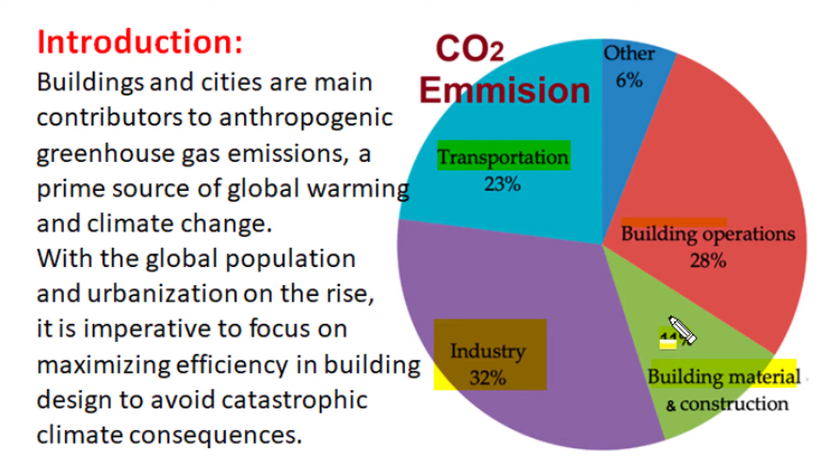So in total, 40% or 2/5 of total CO2 emission from man-made activities is contributed by buildings and cities. So we can say buildings and cities are a prime source of global warming, causing severe concern of climate change as global population and urbanization rise. This will enhance greenhouse gas emission and global warming, resulting in catastrophic damages to our environment and ecology, such as loss of ice near poles, rise of sea level, and incidence of intense storms, rains, or severe droughts.

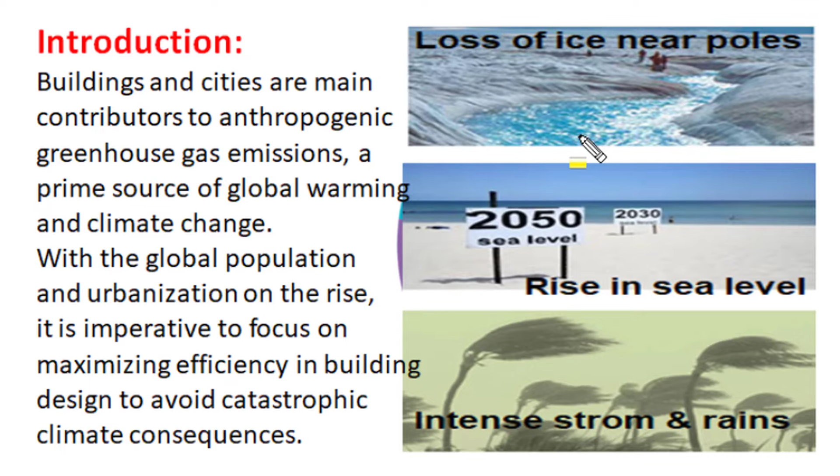So in order to maintain sustainability of our environment, it is imperative to focus on maximizing efficiencies in building design, so that we can avoid the catastrophic climate consequences which people are facing nowadays.

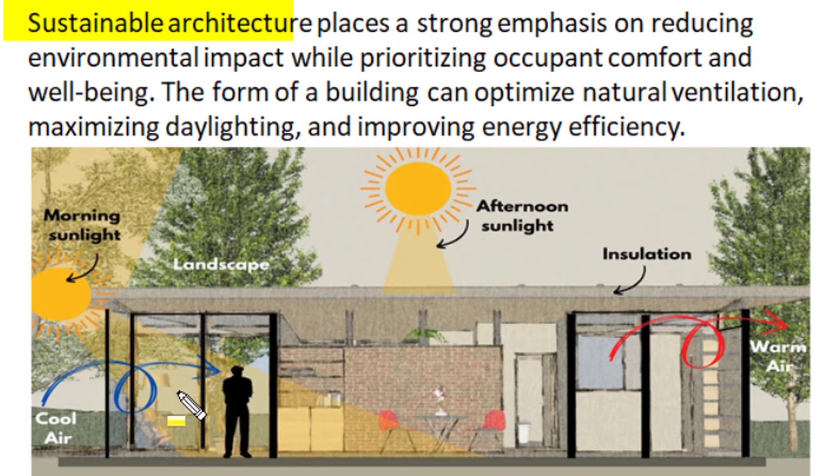Sustainable architecture or the concept of green building places strong emphasis on reducing the environmental impact of building operation while prioritizing occupant comfort and well-being. Such green buildings use a form of building that optimizes natural ventilation, maximizes daylighting, and improves energy efficiency in heating, ventilation and air conditioning of building space.

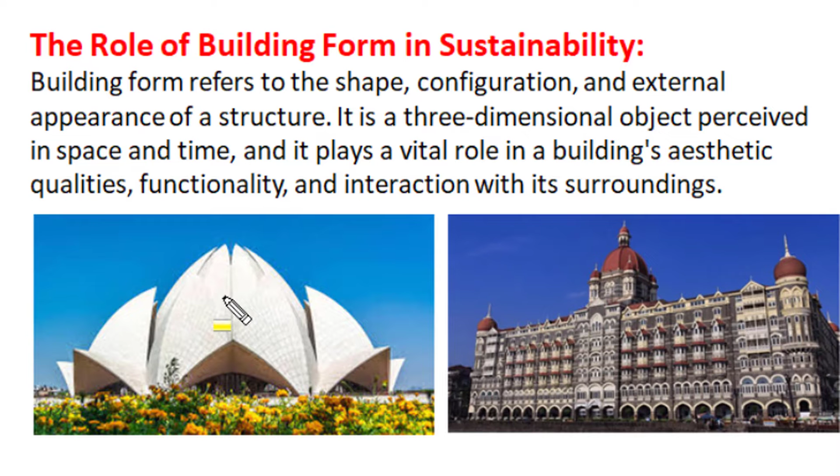Building form refers to the shape, configuration and external appearance of a structure. It is a three-dimensional object perceived in space and time by visual experience, and that plays a vital role in a building's aesthetic qualities, functionalities and its interaction with surroundings. A correct building form has a great role in sustainable architecture.

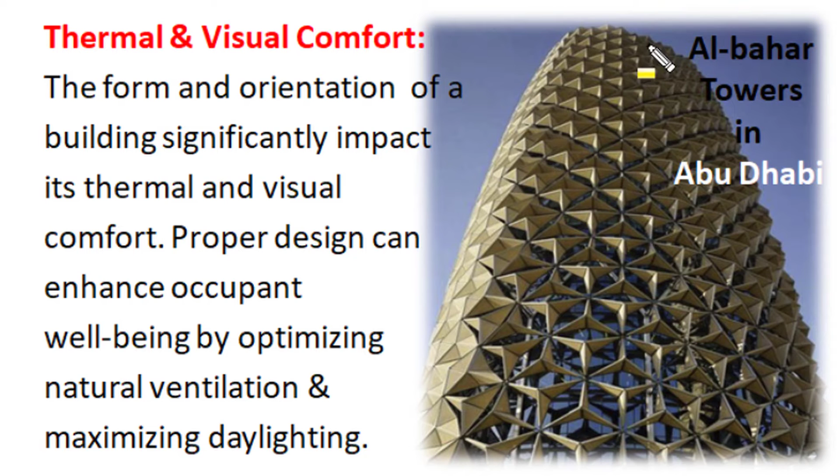The proper design of building form can enhance occupant well-being by optimizing natural lighting and natural ventilation, which optimizes passive energy efficient design. The building form decides size, shape, material and design of the building envelope, and this building envelope is crucial for controlling thermal heat transfer between indoor and outdoor spaces.

In a well-designed building form, one can reduce the area size of the building envelope or external surface area, and simultaneously increase internal volume. This will lower heat transfer losses and enhance operational efficiency, lowering energy consumption and minimizing environmental impacts of building operation.

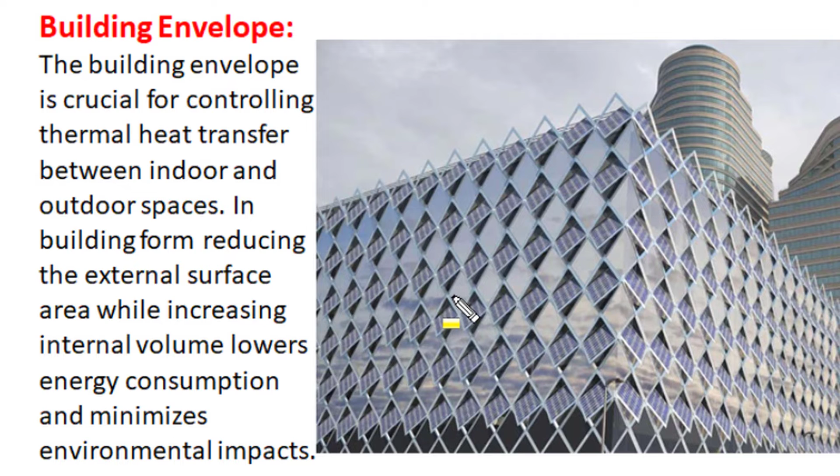The ratio of surface area of building envelope to the volume the building occupies is very important in deciding energy efficiency of building operation, and this surface to volume ratio is decided by building form. Building form determines the volume of space inside a building that needs to be heated or cooled. So we are using volume and we have envelope surface area for heat transfer.

A building which is more compact in shape results in lower surface to volume ratio. Here we have two 6-story buildings meant for office activities, each floor with 10 feet height. One is a rectangle floor plan with size 50 feet by 200 feet, so the total floor area per floor is 10,000 square feet.

Now the same 10,000 square feet could have a square floor plan instead. Both buildings have the same amount of total 6-story floor area, that is 10,000 square feet per floor, and in all 6 floors.

So it is 60,000 square feet in both buildings. But if we consider the envelope surface area, for this rectangle floor plan, the envelope surface area is 40,000 square feet, while for the same total 6-story floor area, the envelope area of the square building is less, only 34,000 square feet. So the square plan has a lesser envelope area and lesser surface to volume ratio, making it more thermally efficient than the rectangle.

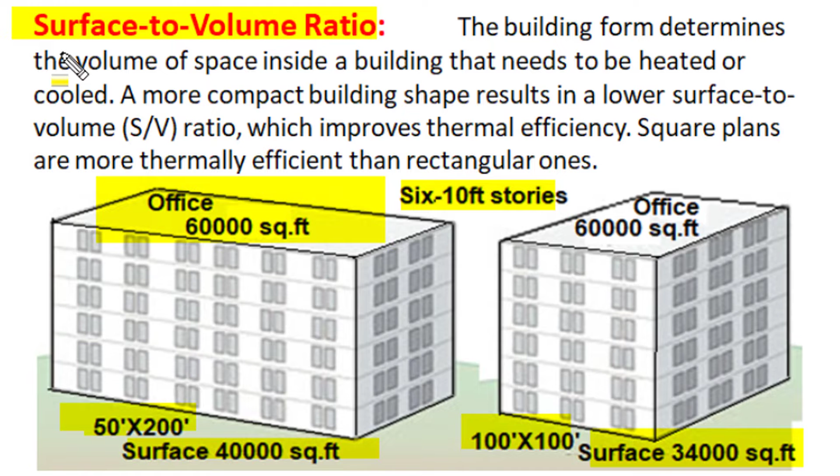And if in place of a square plan we had used a circular plan, that would fetch a more compact building design with a lesser surface to volume ratio, or better thermal efficiency.

When we consider building form for energy efficiency of building operation, we should consider its total floor area, perimeter, building height, and surface to volume ratio. If a building has a greater perimeter to surface area ratio, more heat transfer will take place from the envelope sides, so it will have both more heat gain in summer and more heat loss in winter. So for energy efficient operation, we have to reduce this perimeter to area ratio.

In place of a rectangle floor section, a square floor section has a better, lower value of perimeter to area ratio. And for any geometry, the minimum perimeter for a given surface area will occur when the geometry is circular.

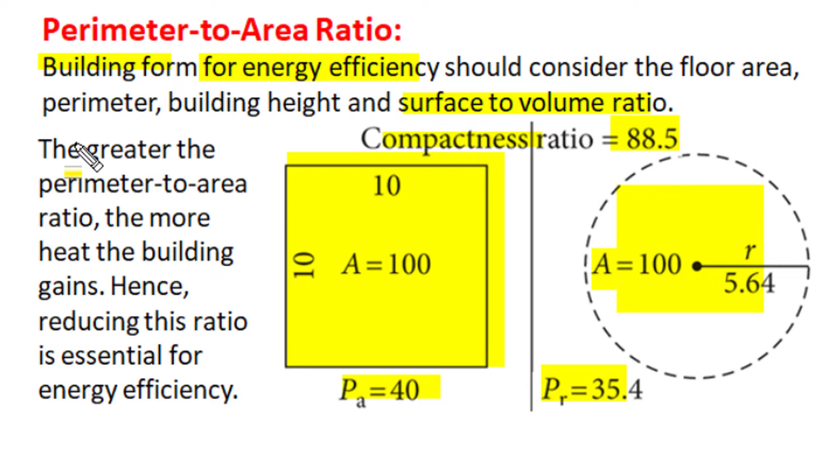So for a 10 by 10, 100 unit floor area, if we take a circle of radius 5.64 units, it would have an internal area of 100 units, but its perimeter is less than that of the square section. In the square section, the 4 sides of 10 units each give a total perimeter of 40 units, whereas for a circle of radius r, the perimeter is 2 pi r, which is 35.4. So compared to the square section, the circular section has a compactness ratio of 88.5. So in place of a rectangle section, the square section is better, and the circular section is the best.

So building form—the shape, configuration and external appearance—affects the sustainability of any building structure, and building form is influenced by the choice of material and construction techniques used to build any space.

When we use simple forms with basic shapes and small volume, it will minimize use of material resources, which not only saves construction cost but also reduces the environmental impact of building construction and operation. So simple forms with basic shapes, small envelopes, and compact designs are suitable for sustainable architecture as they reduce environmental impact of building construction and operation.

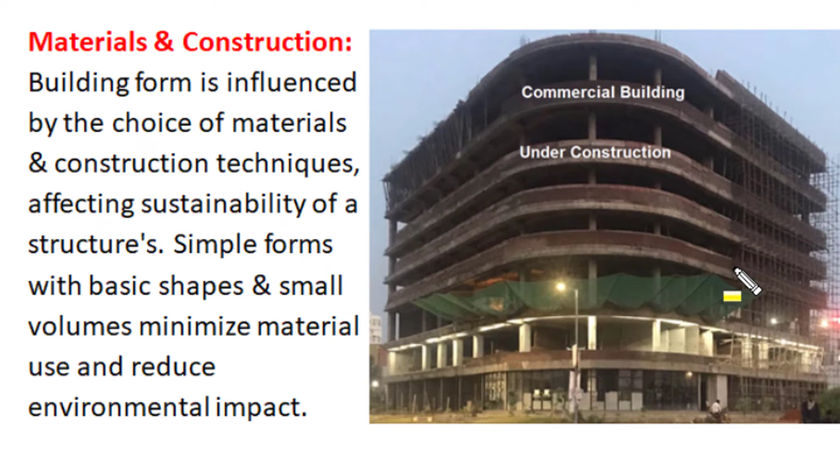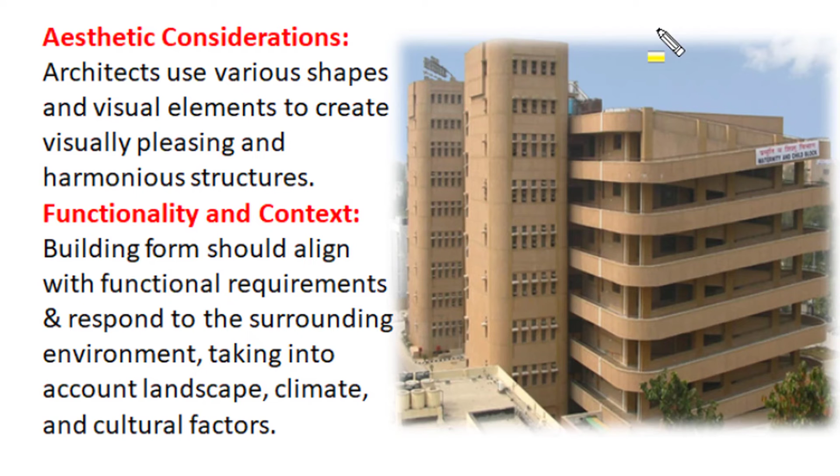Architects use various shapes and visual elements to create a visually pleasing and harmonious structure for an aesthetic, pleasant, attractive appearance of the building. All building forms should align with the functional requirements of the building space, and should respond to the surrounding environment, taking into consideration the landscape, climatic conditions, and cultural and functional factors. As this building form of a hospital generates the required aesthetic considerations as well as fulfilling functionality and context requirements.

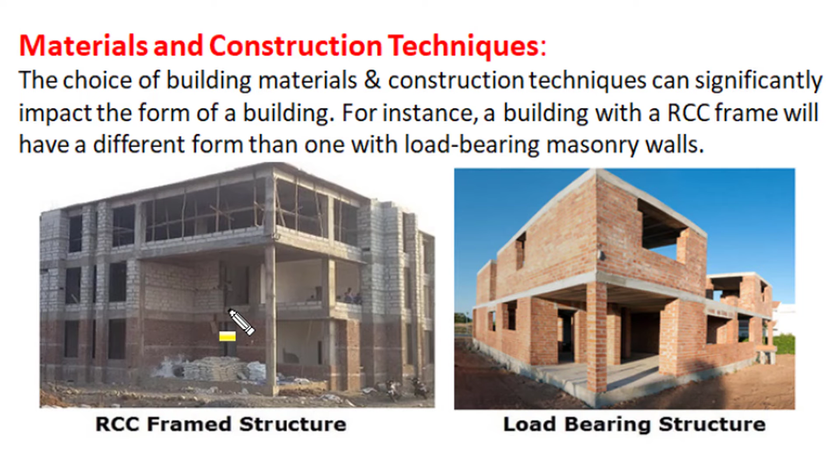The choice of building material and construction techniques can significantly impact the form of a building—its shape, configuration, or external appearance. For instance, a building with an RCC frame structure has a different form and has more flexibility in form design, whereas a building with load-bearing masonry walls has a limitation in form selection and should have a simple straight line formation for its building form. So the choice of building material and construction technique has an impact on the form of a building.

Different architecture styles have unique forms that can be associated with specific cultural or historical references. For example, Gothic architecture is known for its pointed arches and ribbed vaults, while modern architecture often features clean lines and minimal ornamentation.

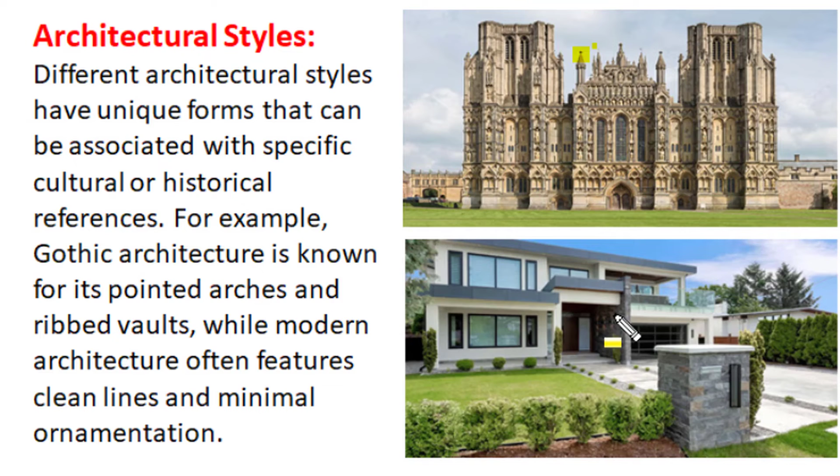Building form significantly influences natural ventilation. Cross positioning of openings and windows enhances natural ventilation, and this reduces reliance on mechanical heating, ventilation, or air conditioning systems, resulting in savings in energy consumption. So careful orientation and proper layout promote cross ventilation.

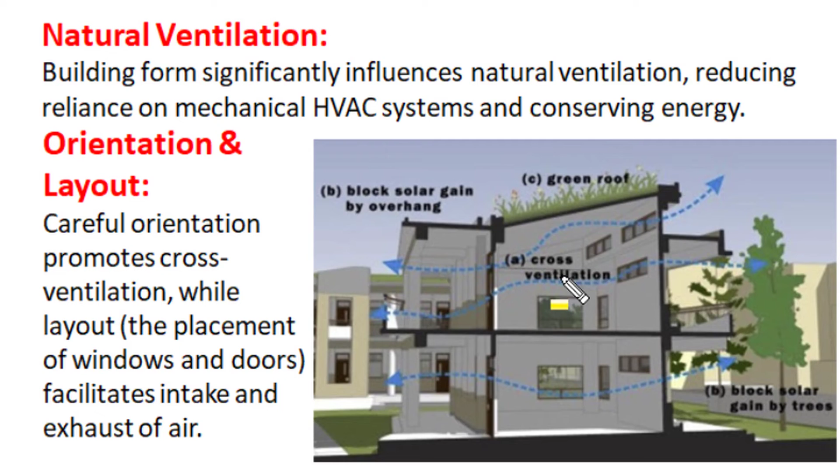The placement of windows and doors facilitates intake of fresh cool air and exhaust of bad and hot air. Building shape decides the facility of natural air circulation. If a building shape has open courtyards, atria or open plans, then it will encourage natural air circulation and improve energy efficiency of building operation.

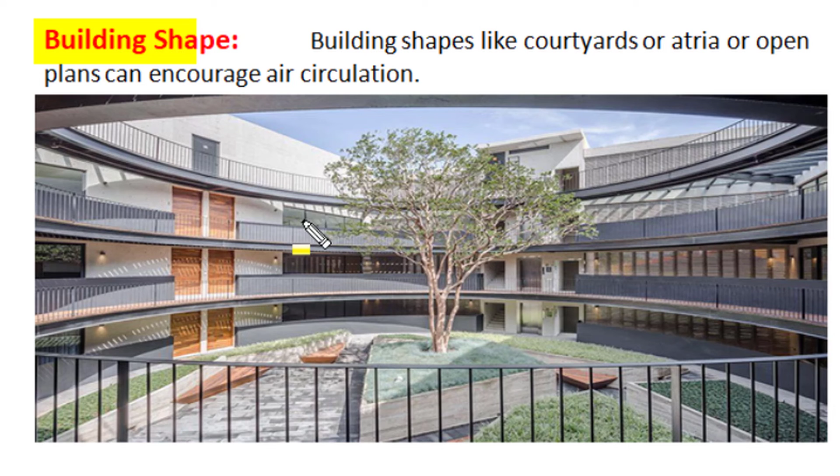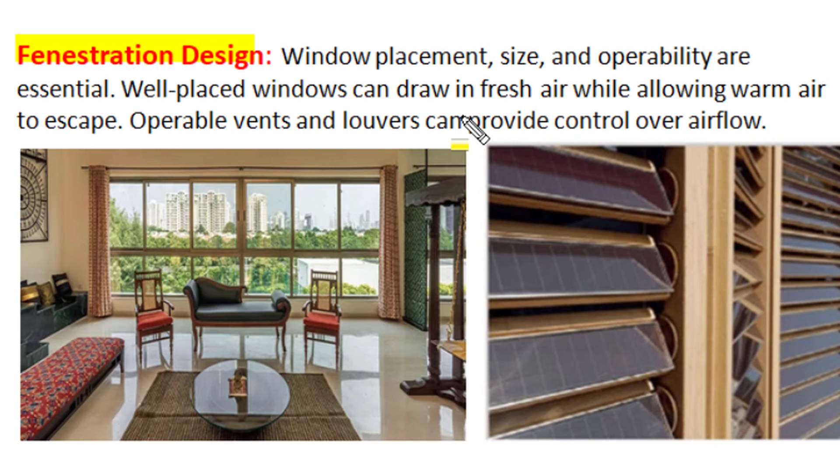Fenestration design in a building is also a part of building form. The placement of windows, their size and their operability is very essential for energy efficient green buildings. Well placed windows can draw fresh air inside the building space while allowing warm bad air to escape out of the building. Operable vents or louvers can provide manual or automatic control over airflow. So fenestration design, placement of windows at appropriate positions and of appropriate size is very important in a building form.

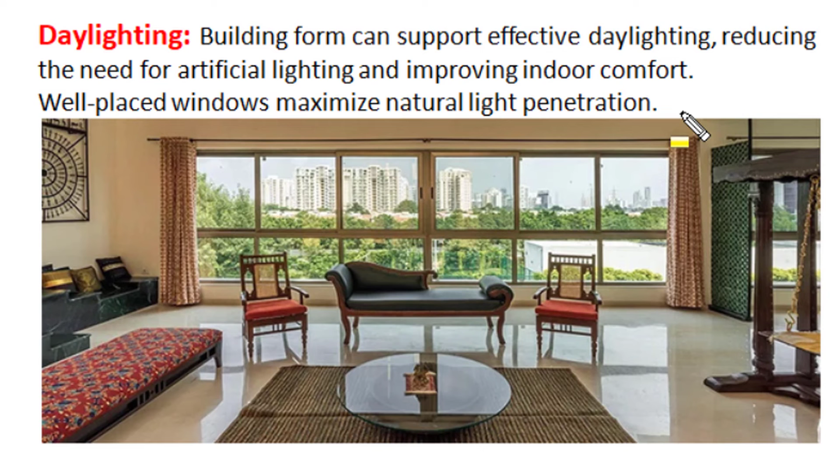Good fenestration design in a building form can support effective daylighting, and that reduces the need for artificial lighting and also improves indoor comfort with glare-free, good illumination levels and uniform lighting by natural means. Well placed windows maximize natural light penetration, and appropriate external shading can reduce glare and the heat component of solar radiation. Good architectural features in building form can be used to enhance natural daylighting in building operation.

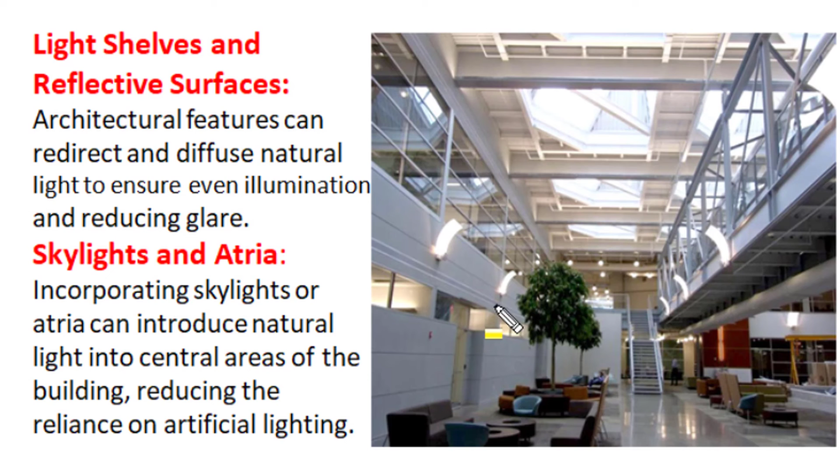Light shelves, reflective surfaces, skylights or atria can direct, redirect or diffuse natural light to ensure even illumination, uniform lighting and glare-free vision. So in a building with central area locations, we can introduce natural daylight by incorporating skylights or atria, and this will reduce the requirement of artificial lighting, conserve our energy resources and enhance comfort and well-being of occupants.

The most important consideration for any green building operation is its energy efficient performance, and building form directly affects energy performance of building operation. An energy efficient building should have a compact design. A compact design minimizes the exterior surface area from which heat gain or heat loss will take place, and such compact buildings having less surface area to volume or less perimeter to floor area become more energy efficient in operation, and this compact design consideration is especially important in regions with extreme hot or cold climates.

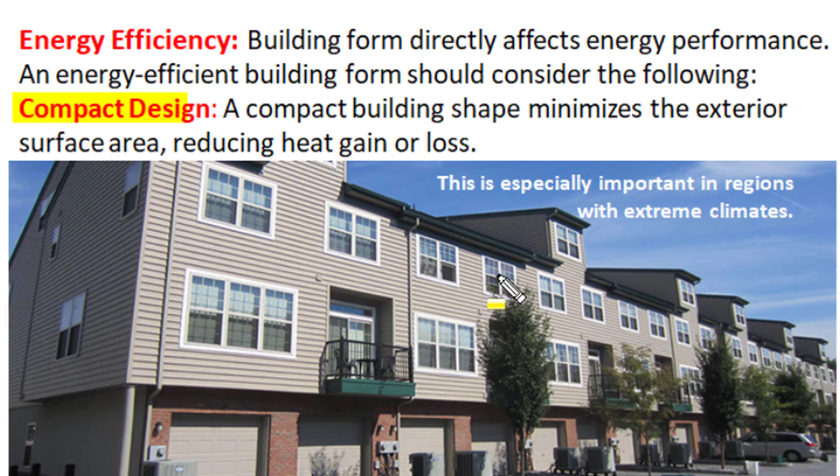A building form with suitable building material for insulation and the required amount of thermal mass can ensure appropriate temperature conditions inside the building space to ensure comfort and well-being of occupants. So building material and wall thickness influence thermal performance of any building form. Proper material selection, thickness and design create the required insulation, and use of thermal mass maintains indoor temperature, as thermal mass absorbs daytime heat and the same heat, when released at night, maintains indoor temperature.

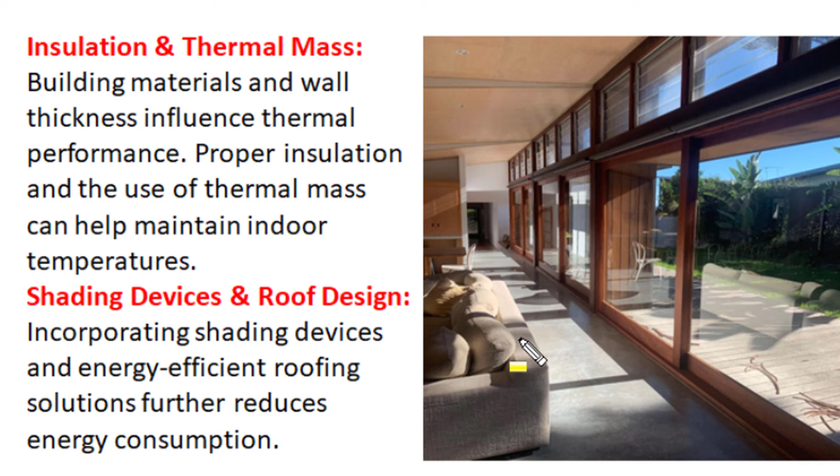Now to stop excessive heating during daytime, we can incorporate proper shading in form design, and such shades with appropriate thick glass paneling reduce heat gain during summertime, and in winter when the sun is at lower positions, this shading won't come in between the sun's radiation and the building, and the space can get both light as well as heat of the winter day. So appropriate shading design, appropriate shading devices, roof design, use of insulation and thermal mass can maintain indoor temperature for comfort and well-being.

In conclusion, we can say sustainable building design is a multifaceted endeavor, and building form is one critical aspect of sustainable building design. By considering natural ventilation, daylighting, and energy efficiency in the initial design stage, architects can create structures that not only minimize environmental impact but also enhance the comfort and well-being of occupants and reduce operation cost of the building. The integration of these principles of natural ventilation, daylight, and energy efficiency into building form is a key step towards a more sustainable and resilient built environment.

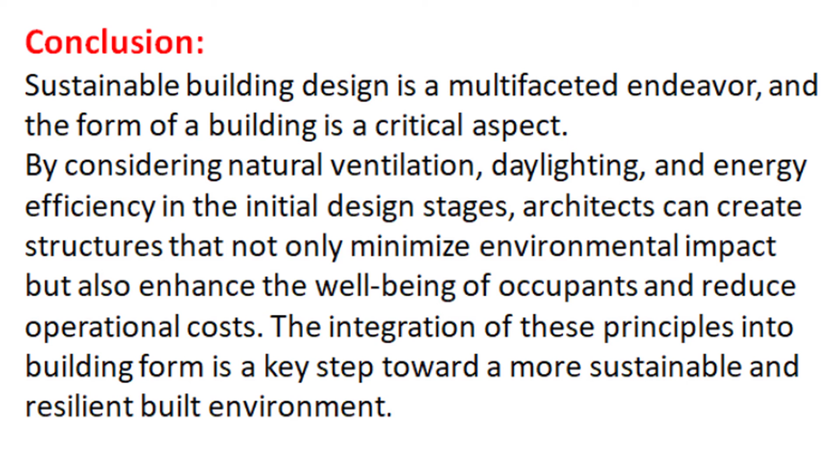In this learning video, we could understand that building form, which is basically the shape, configuration, or external appearance of any building, is very important in sustainable architecture, as this can ensure natural ventilation, daylighting, and energy efficiency in building operation.